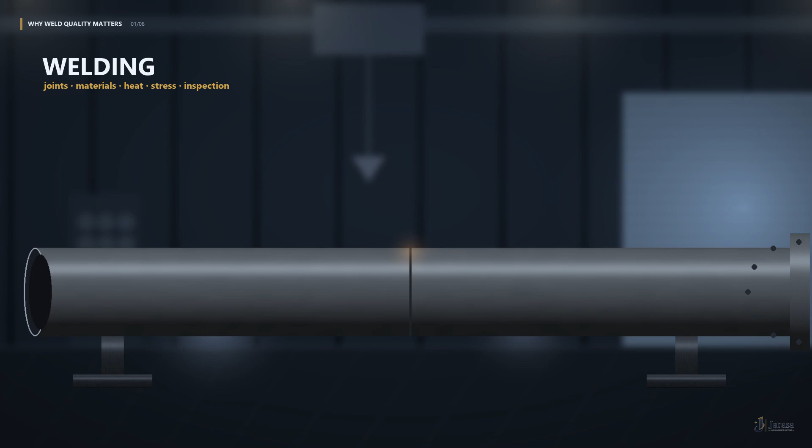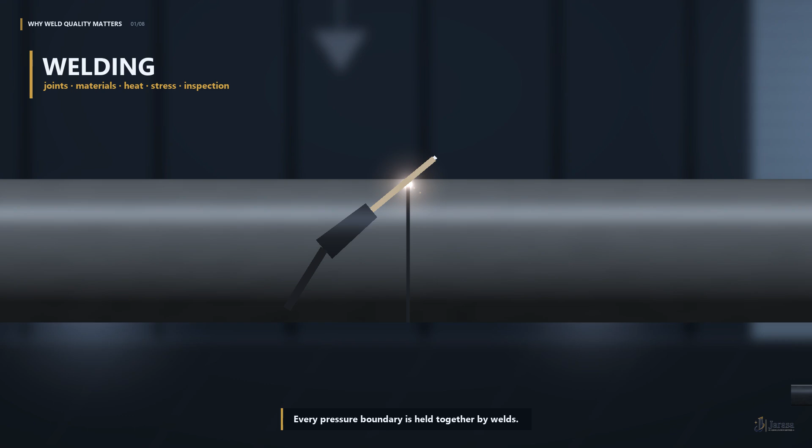A fabrication bay. A pipe spool on stands, waiting for a joint. Everything that will ever hold pressure in this line depends on what happens in the next few minutes. Look closely at the prepared edges. A bevel. A root face. A gap set with care.

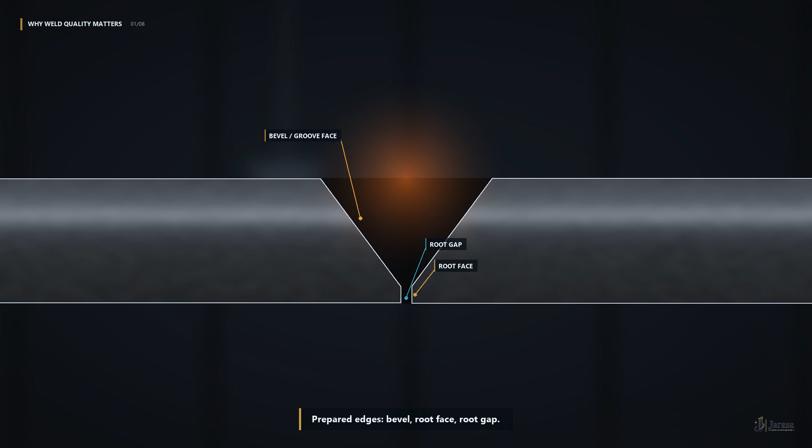Now the arc strikes. Metal melts, a pool forms, and the bead runs along the joint, ripple by ripple. Heat floods outward from the fusion line, the heat-affected zone, then cools, and the steel changes color as it goes. This is not a coating. It is a small casting fused into the pressure boundary.

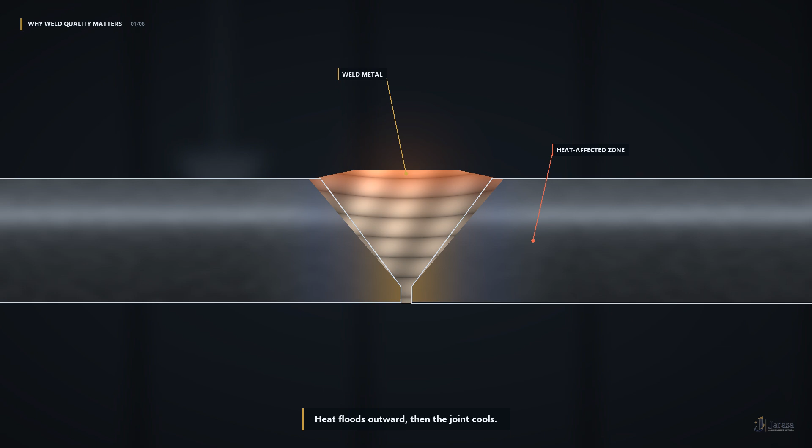We will follow that weld from preparation through to acceptance: joints and grooves, processes and filler, an educational P-number example, heat treatment, the stresses welding leaves behind, and the inspection that proves the joint. Training framing, never a substitute for the code of record on your job.

It starts at the bench, before any arc. The edges are prepared, the parts are aligned, the root gap is set, and tack welds hold the fit-up. Get this wrong and no welder can rescue it. How the parts meet defines the joint.

A butt joint brings two edges together in the same plane, the pipe girth weld, the vessel seam. A fillet joins members at roughly a right angle with a triangular deposit. Corner, lap and edge joints cover the rest. Now watch the groove change shape.

Square, for thin material with a controlled gap. Single V, opening the face for thicker sections. A single bevel, where only one member is prepared. U and J grooves, curved to cut the volume of filler on heavy walls. And double-sided preparations, balancing shrinkage when you can reach both faces.

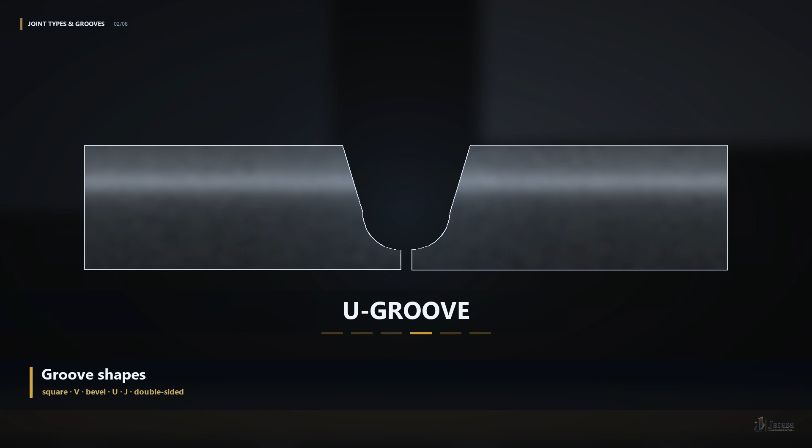Three details govern the root: the bevel angle, the root face, and the gap. Weld symbols carry that intent from the drawing to the fitter. Different processes lay metal in different ways.

Shielded metal arc, stick, burns a covered electrode and leaves a slag blanket that must be chipped and cleaned between passes. Field flexible and forgiving of position. Gas tungsten arc holds a non-consumable tungsten and dabs filler into the pool by hand. Slow, clean, and the usual choice for a critical root in pipe.

Gas metal arc feeds a solid wire continuously under shielding gas, for high deposition in the shop. Flux-cored feeds a tubular wire and pushes deposition rate higher again. The filler must match the base metal for strength, chemistry and service, not simply share a name on a warehouse tag. Take E7018 as an educational example of a covered electrode designation.

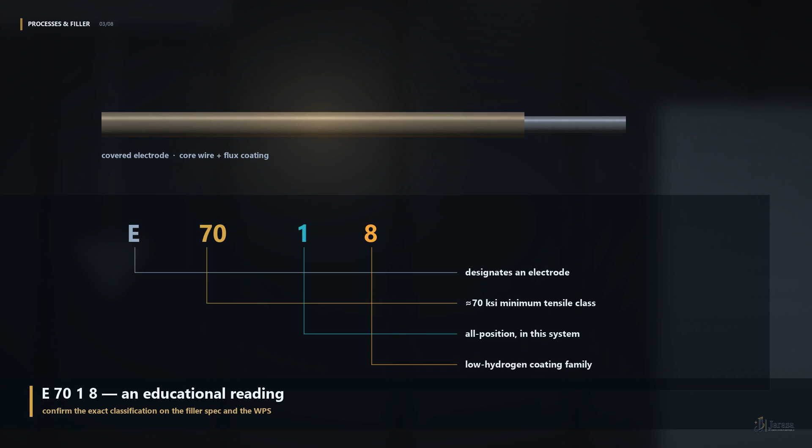70 is a minimum tensile strength class, in thousands of pounds per square inch. The 1 indicates all-position capability in that system. The 8 points to a low hydrogen, iron powder coating family. Always confirm the exact classification against the filler specification and the approved procedure.

And remember weldability: the more hardenable the steel, the greater the cold cracking risk in the heat-affected zone, which is why preheat and low hydrogen practice exist. Now the paperwork problem. A plant holds dozens of base metal grades, and qualifying a separate welding procedure for every one of them would be impossible.

ASME Section IX solves this by grouping base metals that behave alike for welding into P-numbers. Watch the population filter down. Out go the stainless grades, the nickel alloys, the aluminium. What collects together is the carbon steel family, the P-Number 1 concept.

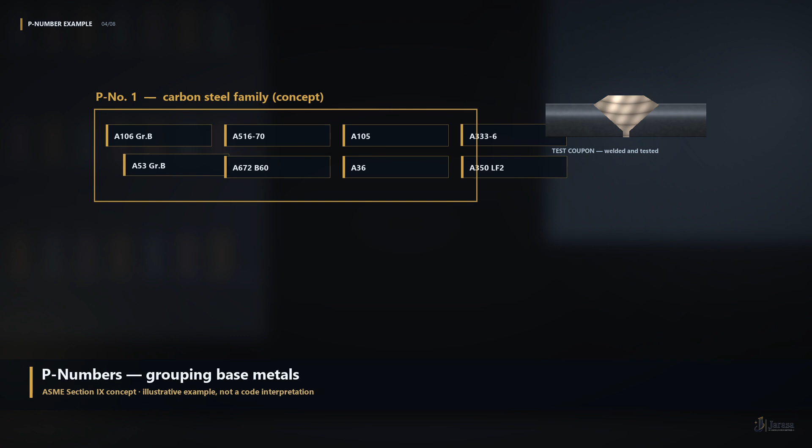Here is an illustrative example. You need a procedure for carbon steel process piping in that family. You weld and test a coupon on a representative P-Number 1 base metal, and the results become a procedure qualification record, the PQR. That single qualified record can then support welding procedure specifications for other permitted P-Number 1 combinations, within the thickness, process and essential variable limits of Section IX.

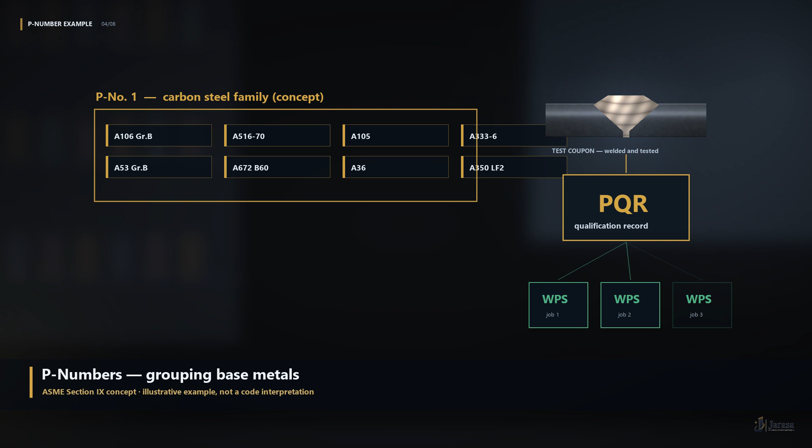Two companion groupings help: F numbers group filler metals for qualification, and A numbers describe the deposited weld metal chemistry. This is training language, not a code interpretation. Verify the edition, the essential variables, and the owner's specification before you claim anything is qualified.

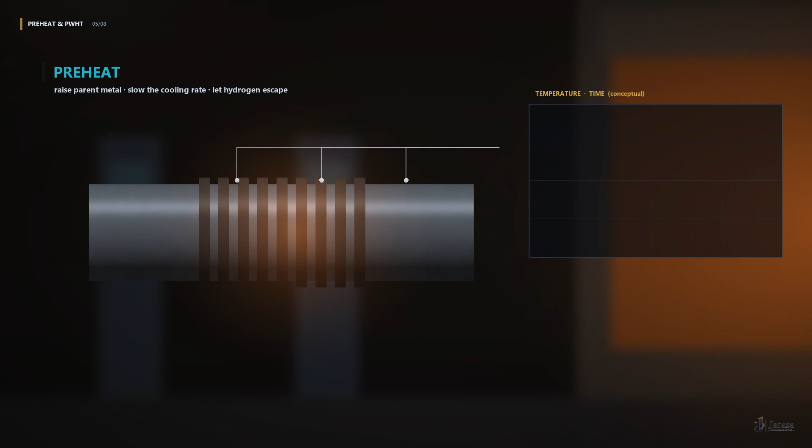Heat is a controlled variable, before, during and after welding. Preheat raises the parent metal before the arc ever strikes. It slows the cooling rate, gives hydrogen time to escape, and reduces the risk of cracking in hardenable steels. Interpass temperature is the ceiling you hold between passes, protecting toughness and microstructure.

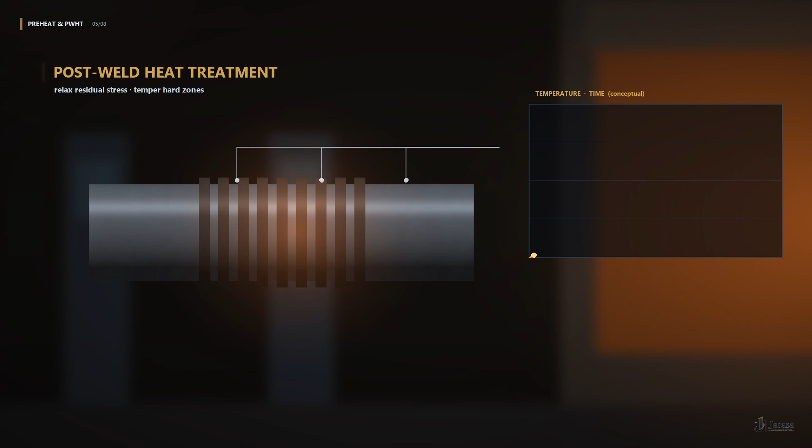Then, when the code or the specification calls for it, comes post-weld heat treatment. The joint is heated under control, in a furnace, or locally under blankets, held at temperature to relax residual stress and temper the hard zones, then cooled at a controlled rate. Watch the curve. A ramp, a soak, a controlled cool.

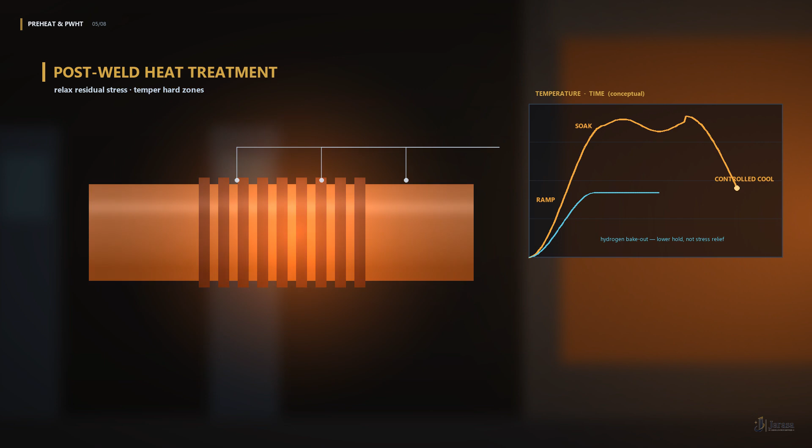Distinguish this from a hydrogen bakeout, which is a lower temperature hold intended to diffuse hydrogen out of the weldment. A bakeout is not stress relief, and it never replaces a required post-weld heat treatment cycle. Temperatures, ramp rates, and hold times belong to the applicable construction code, material group and thickness. Treat anything you see in a classroom as illustrative only.

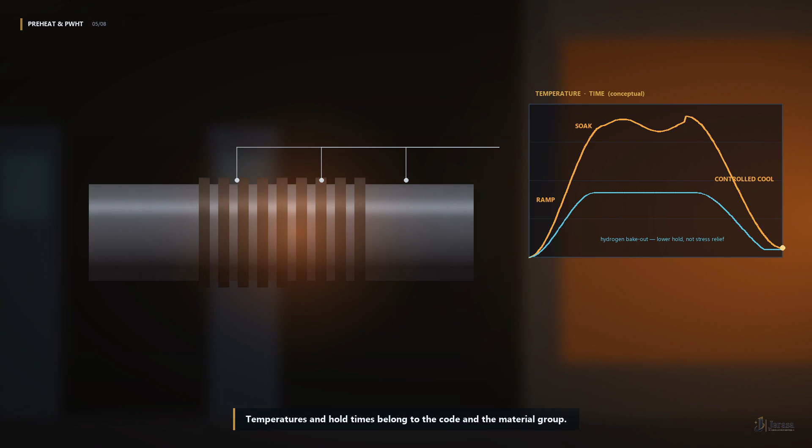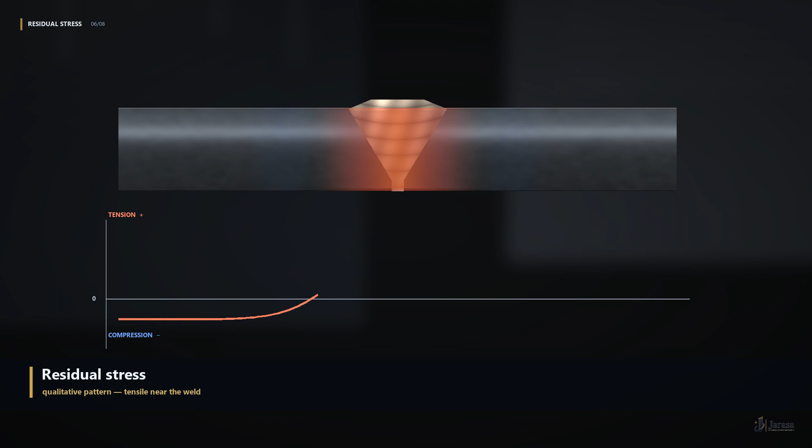Tension sits in the weld and heat affected zone. Compression balances it farther out. No external load is applied, and yet stress is present, a self-equilibrating residual field.

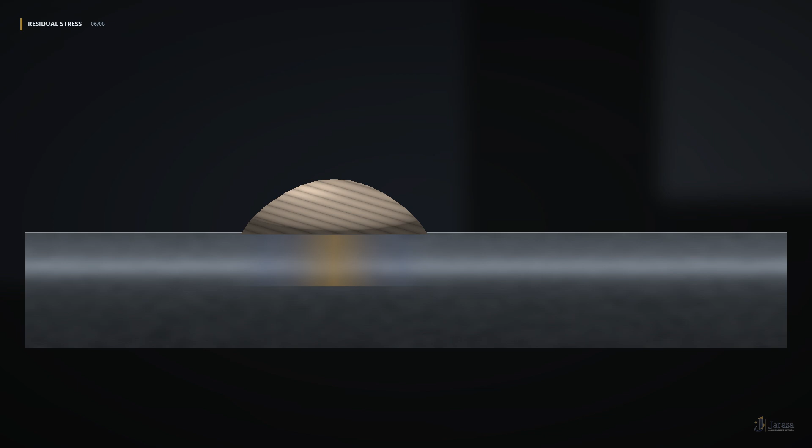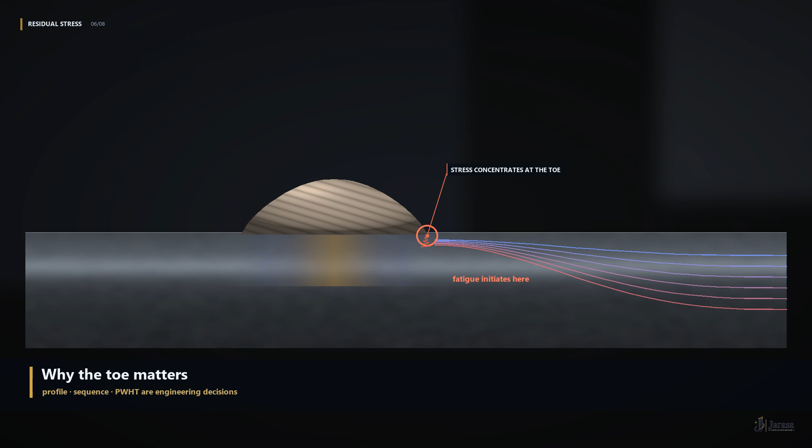Now look at the toe, where the weld face meets the plate. Service stress flowing through the joint crowds into that change of section. Add pressure, thermal restraint and cyclic operation on top of the residual tension, and this is precisely where fatigue cracks begin. That is why joint profile, welding sequence, and post-weld heat treatment are engineering decisions, not cosmetic ones.

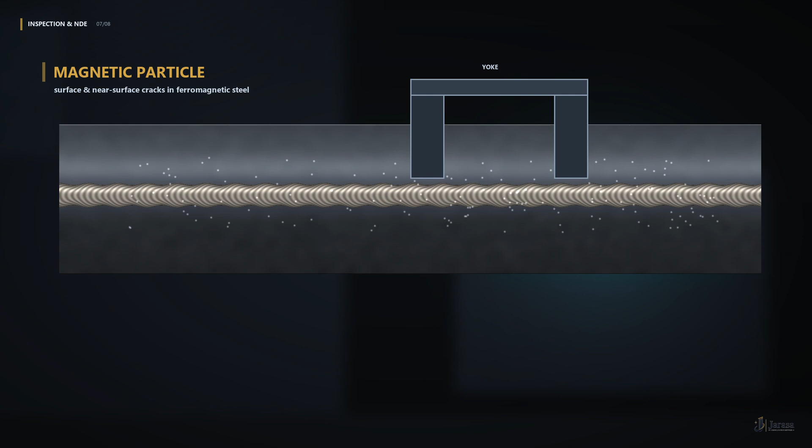Finally, the joint has to be proven. Visual examination comes first and never stops: fit up, profile, undercut, surface condition, pass by pass. Liquid penetrant is drawn into anything open to the surface, and the developer pulls it back out as a visible indication. Magnetic particle testing magnetizes ferromagnetic steel, and particles gather where a surface or near-surface crack disturbs the field. Both find surface flaws. Neither tells you what is happening inside the wall.

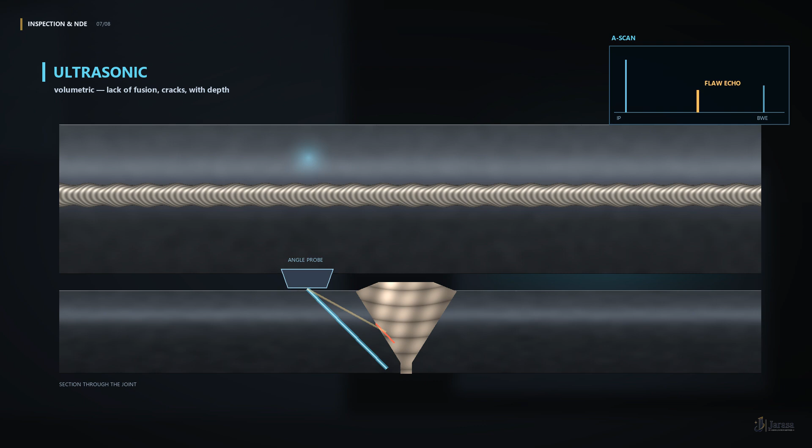For that you need volumetric methods. An ultrasonic probe sweeps along the weld and sends a beam into the joint. When it meets lack of fusion or a crack, an echo returns, and the flaw's depth comes with it. Radiography exposes the volume through the thickness and images what lies within. Match the method to the defect you are hunting, because a technique that cannot find your flaw earns you nothing.

And behind all of it stands the documentation. The welding procedure specification says how to weld. The procedure qualification record proves that procedure produces sound properties. Welder qualification proves the person can execute it. The inspector's checkpoints run from fit up and preheat, through parameters, to final examination and closeout.

The finished joint carries pressure, temperature and time, quietly, for years. It earns the trust from the whole chain, not one step. Prepare and fit the joint correctly. Match filler and process to the base metal and the service. Use P-number grouping thoughtfully, and verify against Section IX.

Control preheat, interpass and post-weld heat treatment. Respect the residual stress and distortion you have built in. Then inspect with methods that can actually find the defect you fear, and keep the documentation aligned with what was really welded. That is how a weld stops being a risk and becomes a barrier.